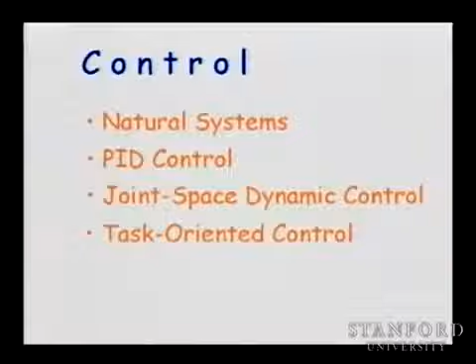And then we'll discuss how we can apply control techniques directly to the task, the way humans do it—by directly applying a force, not through inverse kinematics or at the joints, but directly controlling the end effector's motion, velocity, and acceleration.

At the end, we'll see that motion control isn't the only thing we need when we have a robot. You really need to interact with the environment, and to do that you need to control the contact forces. If you're sliding over a surface, you're moving while also applying a contact force. That's going to be a critical technique in order to interact with the world, affect objects, assemble, move, and cooperate with different robots.

So a manipulator like this one can be controlled directly through its joint motion by simply imagining that you have springs at the joints. And if you just put springs, this mechanism is going to oscillate if you disturb it.

So what do we need to add? I'm just talking about a passive mechanism—you put a spring and now it holds itself at some configuration, but if you disturb it, it will oscillate. So what do we do to make it asymptotically stable? Put some damper. If you place a spring and a damper at each joint, you'll basically go to that resting point of all the springs, which allows you to be at that configuration.

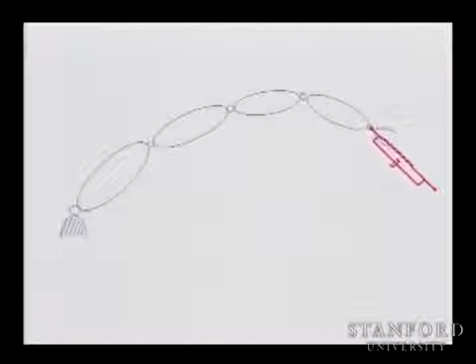Yeah, so exactly, I mean just pull it, right? Just put the spring there. Anyway, I gave you only one spring, so you have to just place it somewhere. All right, so, okay, what is going to happen here is you are going to pull the end effector to that location, to the resting position, and it will do this, and everything will fall. You don't know where it's going to be, but it will fall.

And we will see that the concept is as simple as this, well, in 6 dimensions, x, y. So the spring is like a 6-dimensional spring. All right, so this is basically the concept of task-oriented control.

I mean, you can think about the spring as a passive spring, or some attractive potential energy that you are creating at the end effector, with a gradient that is pushing you towards the goal. And that gradient is actually coming from the spring. The spring has a potential energy when it's disturbed, and when you go to rest, you reach the minimum of that energy, and essentially you're applying the gradient of the potential energy.

Okay, so in joint space, this is what is happening. As I said, we have an inverse kinematic problem. We have a task that is described in terms of x, y, z, the orientation of the end effector, alpha, beta, gamma, whatever representation you have. You need to compute the desired joint motions, and then you have those, desired motion 1, desired motion 2, etc.

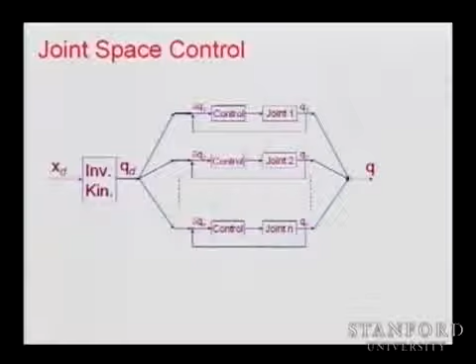The problem is you have this inverse kinematic all the time in the system. Another approach that came about as early as 69, 70, 71, and there is a paper by Dan Whitney in 72 describing resolved motion rate control. So rate means we're looking at the derivative, the velocity, and the idea is, instead of doing the inverse kinematic using the forward kinematic and taking its inverse, to find a small displacement, delta theta or delta q, that corresponds to your desired displacement, delta x.

So what do you think we have in our menu as models that could help there? So we would like to find a relationship between delta x, a small displacement. So I'm at x, I would like to move a little bit, delta x. What would be the delta q?

So what model should we use? And you don't say it. Someone else.

Yes, the Jacobian. Actually, the inverse of the Jacobian. Here is the Jacobian, it relates precisely delta x to delta theta. If you take the inverse, you have to make sure you're not at a singularity, otherwise you have to do special treatment of the configuration. If you're outside of the singularity, and if you have 6 degrees of freedom, regular case, square matrix, then you can take the inverse. Otherwise, you have to resort to generalized inverses or pseudo inverses.

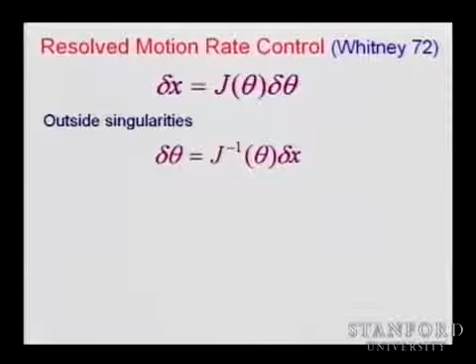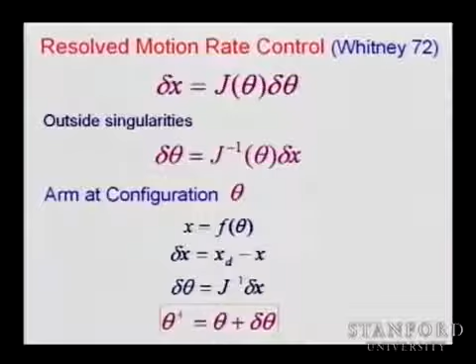So you compute a delta theta. So for a small delta x, now you have your delta theta, knowing your theta, knowing where you are, the next configuration you want to go to is theta plus delta theta. You start from your current position x, you compute the error, that is the x desired minus your current position, and then you compute your delta theta and you add it to theta. So you keep controlling the robot to this theta plus, which is where you were plus the small displacement. And this is a vector.

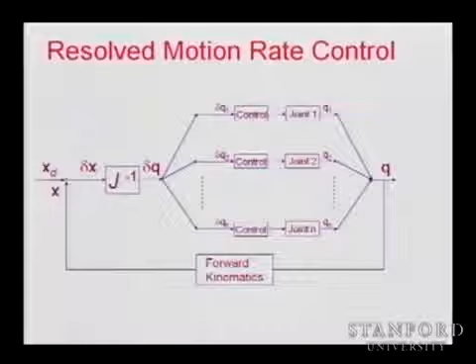So here is the model. Now the Jacobian inverse is inside your servo control loop, and you need to compute the forward kinematics, which is easier to compute, especially for you now. Very easy, forward kinematics. So forward kinematics include the Jacobian, you just have to invert the Jacobian. And for a small robot, you can get it almost in analytical form. So basically, you compute a delta Q and you distribute it to all the joints. And you have controllers for each of the joints to move and form this error in delta Q, and you move. So now you're continuously moving.

Well, this has a lot of problems in terms of the conditioning of the Jacobian, the fact that the Jacobian has this strange thing about its metric, because the space where you are measuring delta x involves linear motion and angular motion. So linear motion is measured in displacement in centimeters or meters or inches, but it also has rotational motion measured in degrees or radians, and it's all included in the Jacobian. So the metric of the Jacobian is not homogeneous, and that creates problems. Also, you have the singularities, you have the redundancy, you have all of that, in addition to the fact that you have dynamics.

So this works usually most of the time, but it works best if you use it to find the trajectory you want to execute. In industrial robots, often you want a repeatable trajectory, and this doesn't repeat, you will drift. So if you do this in simulation, you will be able to find a trajectory, resolve the inverse kinematics this way, and then come up with a trajectory that you can execute.

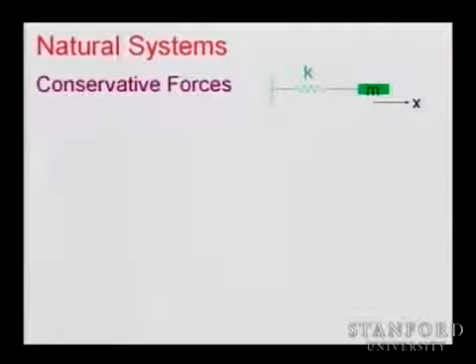So this is K, and we can write this equation. If you write this equation using K that we saw here, and take the derivative with respect to x dot, it gives you mx dot. The derivative of K with respect to x is 0. So you get the time derivative of that quantity, mx double dot equal F.

And the potential energy of the spring is 1/2 kx squared. That gives you the gradient. When you take the derivative with respect to x, you get minus kx.

So the Lagrange equation is a Newton equation. In this case, mass times acceleration equals force, and the force is minus kx. It's a conservative force. So you are transferring energy between minus kx and the kinetic energy, which is building velocity and acceleration.

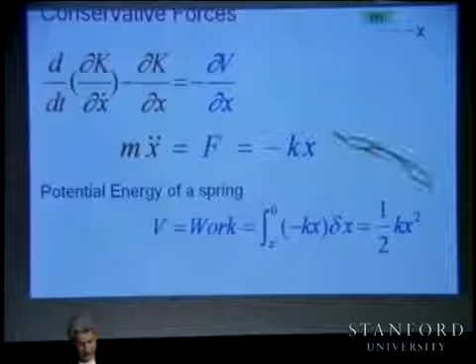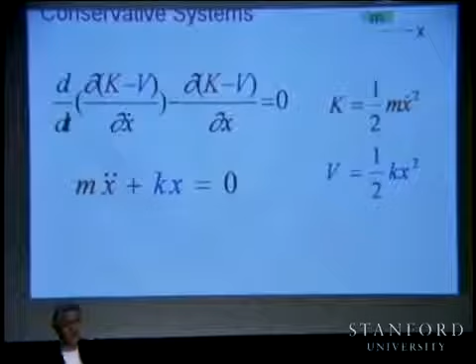For some reason it's written twice, I don't know why, but now I move this minus kx to the left-hand side of the equation, and we have mass times acceleration plus kx equal to 0. So there are no external forces. This kx is the gradient of a potential energy V, and this is the acceleration of your mass.

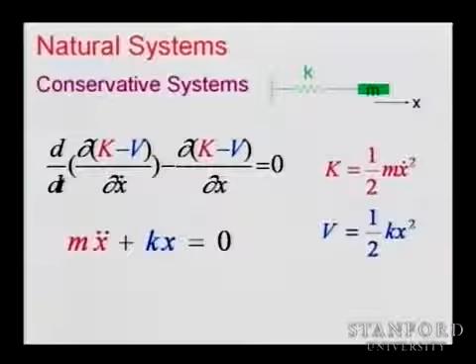Now, let's take a look at the response of this system. I'm not sure if you can see it. You see this red potential energy over there? This is the potential energy of the spring. Let's imagine this green dot is the point mass we are going to drop.

So if we drop this point mass, it's going to fall and it will oscillate, right? There is no friction, so it will keep oscillating forever. This is time, and we are looking at the frequency of crossing this axis. That is, we're going from one side of x to the negative side, and there is a frequency of crossing. So my question to you is, in relation to these two parameters, K and M, what is the effect of M on the frequency?

So if your mass is heavier and heavier, what is going to happen to this frequency? And if your K is smaller and smaller, what is going to happen to this frequency? So if K is very big, what would happen? If K is 0, what is going to happen? K is 0, nothing would happen.

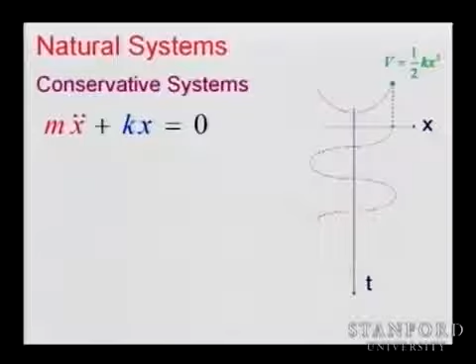Right? K is larger, the oscillation frequency increases. So frequency increases with K and decreases with the mass.

There is this quantity that we call the natural frequency of the system, and this is the square root of K divided by M. Anyone know why, where this omega is coming from? Do you see it from this top equation? Somewhere.

Yeah, if you normalize the above equation... basically, yeah, this is A multiplied by sine omega T, and then—very good. You integrate the equation and analyze its response. If you don't trust this result, let's see how we can resolve and integrate this equation. So if we divide by M, we get the acceleration plus K divided by M times x.

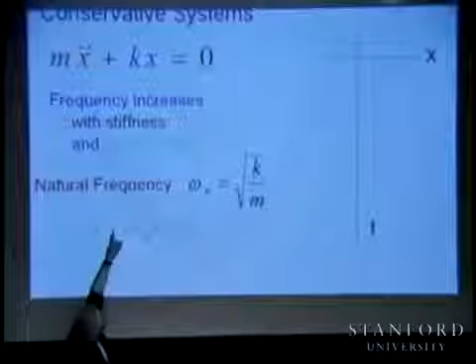Now if you integrate this equation, you get the square root of this coefficient of x that will appear. We usually rewrite this equation on top as omega squared x. So K divided by M is really the square of your natural frequency. And if you write this equation and do the integration, you get a sinusoidal response where omega appears as the frequency of your sinusoidal motion.

So in fact, x that comes from the integration of this equation is some constant times cosine of omega t plus phi. So what do phi and c depend on?

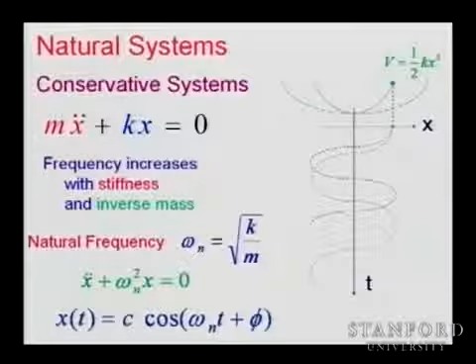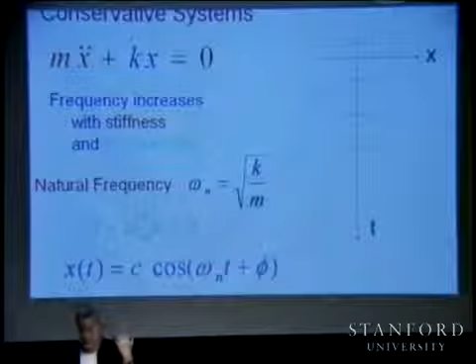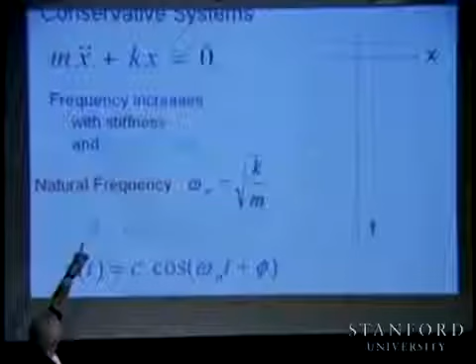Well, if you understand this, we need just one more step, and then you understand PD control. It's very simple. PD control actually is imitating the natural system to recreate a spring. This K will become your stiffness. K is the stiffness, and M is the mass. K will become your proportional gain, and in a few minutes we will see another K that involves the damping that also comes into the equation, but not of conservative system, of dissipative system that dissipates energy because of friction.

So if we are looking at only conservative system without any damping, this is the response. Okay?

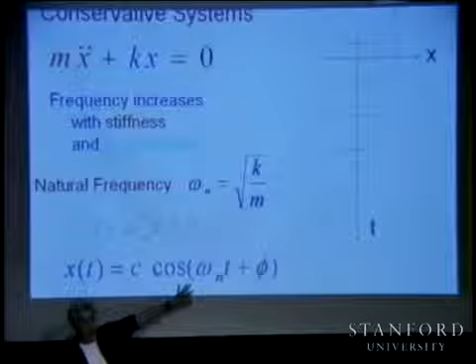So in fact, if we just add a little bit of friction underneath the mass as it's moving, there will be some dissipation of energy, and this dissipation would be a force opposing what? Opposing the motion, opposing the velocity. So it's sort of minus some coefficient times x dot.

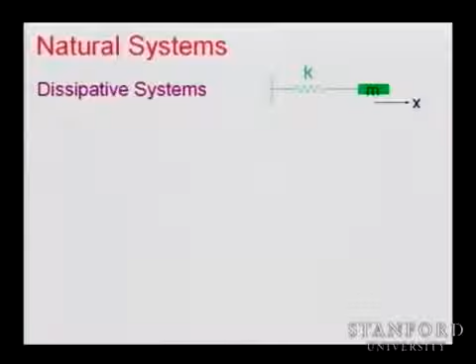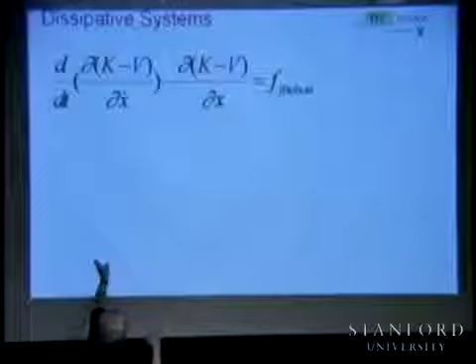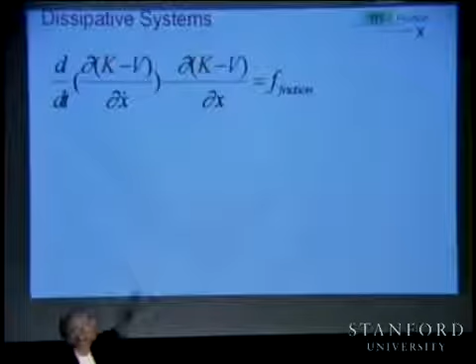And that friction, if we add it to the system, we have to add it on the right hand of the equation. So the Lagrange equation is capturing the natural system on the left side. On the right side, we are putting a natural force, which is friction, but we cannot put it in the left side of the equation because this force is not conservative. It is not a potential energy force. It cannot be integrated in V. So it appears on the right hand of the equation, an external friction force applied by the environment on the object.

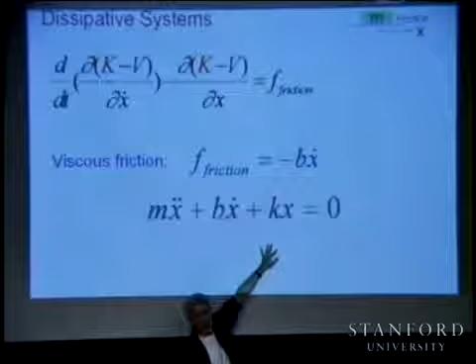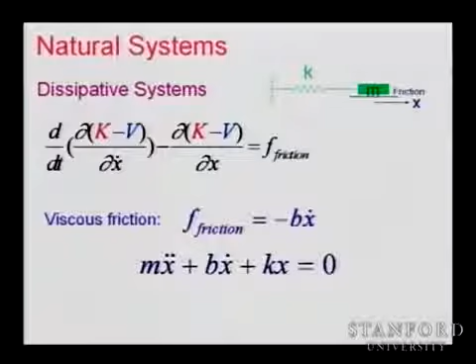My system is not anymore conservative because if you oscillate now, you're going to lose energy, and little by little you lose energy and then you stop. So the mass acceleration plus bx dot plus kx is the general form of a linear system of the second order.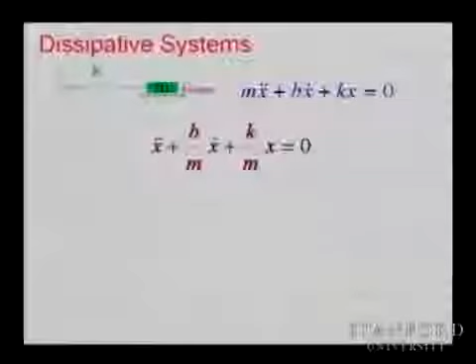And if we take the system and analyze it, so what we do, we divide by the mass. Do you see omega squared now? So we have omega squared, and it's, thank you very much, finished. So I can continue.

Now, what we are going to do with B divided by M? Well, when we integrate those equations, this term is going to appear in some form. So what we would like to do is to see how B is affecting this damping.

So for instance, if you put a large B, very, very large B, and you start falling, you're falling, you're falling. Well, if B is very large, are you going to cross? You will just asymptotically reach that goal position without crossing. So you have sort of an over-damped system. If B is very small, you're going to oscillate, and eventually you will lose the energy and you will converge towards the minimum of the energy.

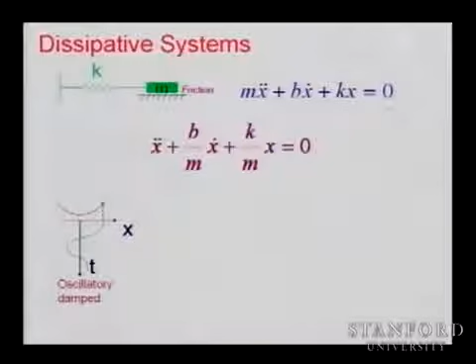So here is an oscillatory damped system. With higher values of B divided by M, we have an overdamped system. And as we move from here to here, there is a special value at which we just go and reach the x-axis. And this value is called the critically damped system. And remember this, we're going to use it a lot, because we try to imitate this behavior when we control any of the systems. We will try to make it critically damped system.

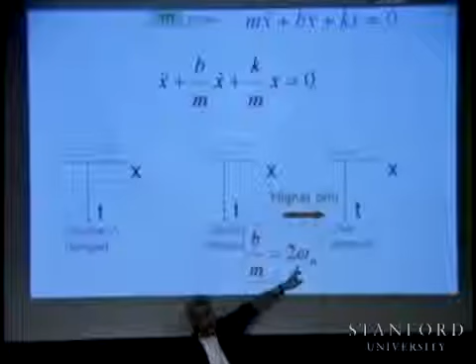So we need to know for which value B divided by M reaches this state. And the value of B divided by M is simply 2 omega n. So when B divided by M is equal to 2 omega n, omega is square root of K divided by M, well, then we have a critically damped system. And this comes simply from the integration of the equation, this condition.

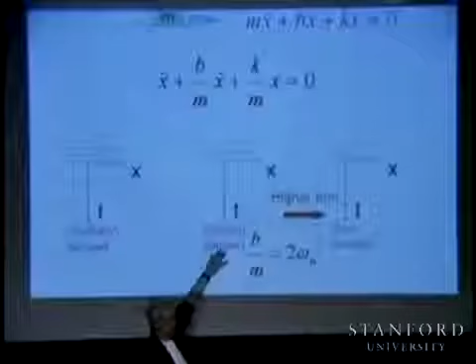So now you can compute B. B, the critically damped B, is equal to what? Come on, 2 omega n times M. All right. So if you know your mass, if you know your K, then you can compute your B to be a gain for your control system. Here B is the natural damping of the environment. So the system is passive.

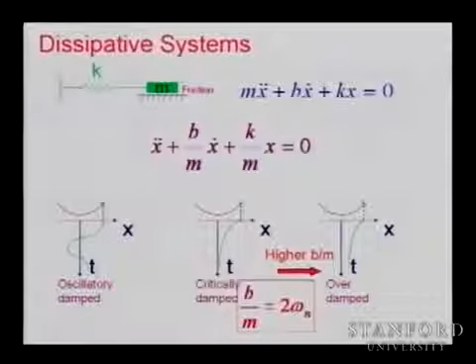So let's take this 2 omega n and try to make it explicit in that first equation. I'm going to rewrite it as a function of omega n and as a function of this critically damped system. To do that, we take B divided by M, the value we have right now, and compare it to the value that gives critically damped behavior. So B divided by M is compared to this critically damped B divided by M. This is a sort of ratio, a damping ratio.

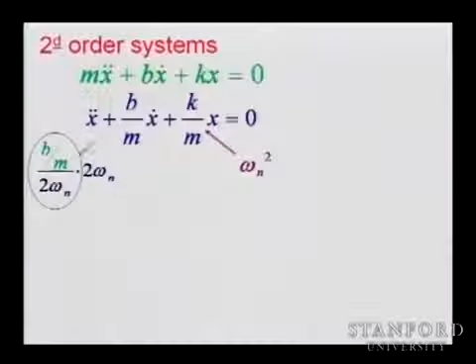I need to replace B divided by M by something that makes 2 omega n appear, so I need to divide by this and multiply by this. You agree? So on the left, I have this ratio, and we call this the natural damping ratio. We use this symbol to represent it. What do you call this symbol? Xi? So we use xi. Xi represents the natural damping ratio. It's B divided by M divided by 2 omega n.

So for which value does the natural damping ratio give me a critically damped system? For 1. When zeta n is equal to 1, it means that B is simply twice the square root of km. And for this value, I will be able to have a critically damped system. Okay, so far so good?

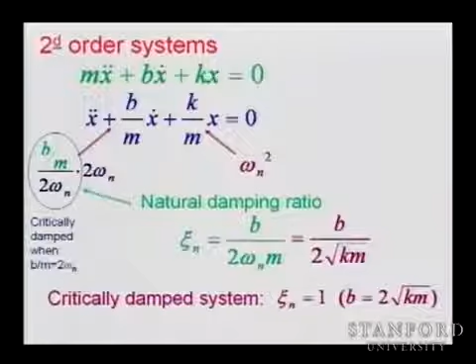Not too confused? So we introduced two notions: the natural frequency, square root of k divided by m, and the natural damping ratio, B divided by 2 square root of km. Now we can analyze our system and write it in this form. The acceleration, it was m times acceleration. We divided by m, and we can rewrite the equation as acceleration plus 2 zeta omega velocity plus omega squared times x is equal to 0.

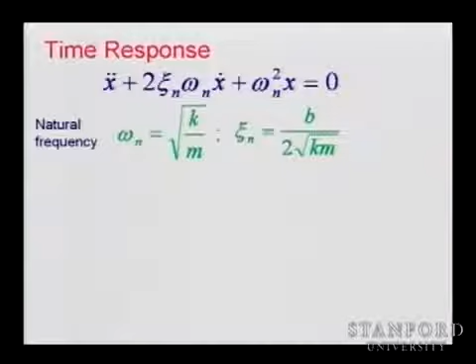Now, the time response of the system requires us to integrate this equation, and if we integrate this equation, we will have this response. Because of the damping, your sinusoidal amplitude is reduced as you move. There is a decrease, and this decrease is exponential, and this decrease depends on zeta and omega. You have the sinusoidal motion, which is a function of your natural frequency, omega, but it's also a function of your damping ratio. You can see when zeta is equal to 1, this will become 0, the cosine of 0. And if it's greater, then there is no cosine because you will have only the exponential.

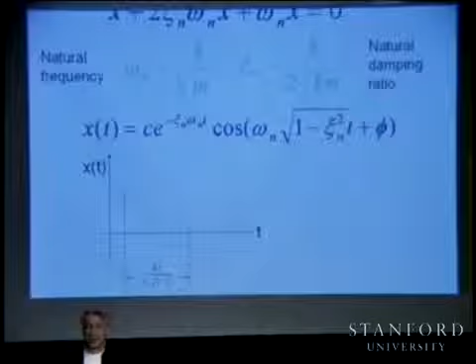Here is the response. So you have this exponential, and you have the frequency that is now a function of omega n square root of 1 minus zeta n squared. That is, the period is 2 pi over omega n square root of 1 minus zeta n squared. So it's not omega n anymore. Omega n was the natural frequency, but this thing that appears there is a sort of natural frequency that is affected by the damping. So we call it omega, the damped natural frequency.

So it was omega, the natural frequency, and now it is damped. I think this is the last definition you need to remember, and with this, we can do almost everything except the nonlinearities we have to deal with a little later. But omega, when you have damping, is really omega n, the natural frequency that appears in your spring, scaled by square root of 1 minus zeta squared, which comes from your damping B divided by the mass and the spring, or the gain of your system.

All right, so these are characteristics of a second order system, and what we need to do is inspire our controller by this, and then we will be able to recreate that behavior simply by selecting what? So if you start with the mass and now you want to create a system like this, what do you need to select? You need to select the spring, which is K, the stiffness of the spring, and you need to select B. So by selecting B and K, you can create this second order behavior on a mass. So if you have one joint with some inertia, to create a closed loop behavior of second order with some natural frequency, some damping ratio, and some damped natural frequency, you should be able just to select B and K and find your system.

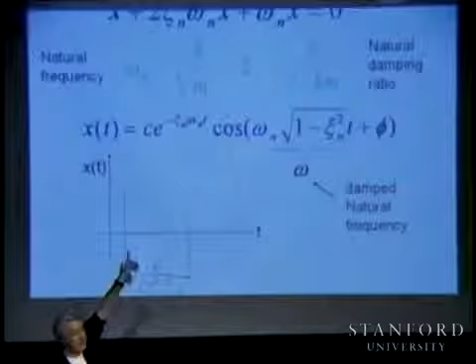Now, compensating for friction is very dangerous. It's not easy. You cannot just go and do some estimate and compensate for the friction. You can compensate for the friction if you want, and I'll show you how dangerous it is.

Okay, here is a robot. What is the name of this robot? The Puma. Okay, let's move it.

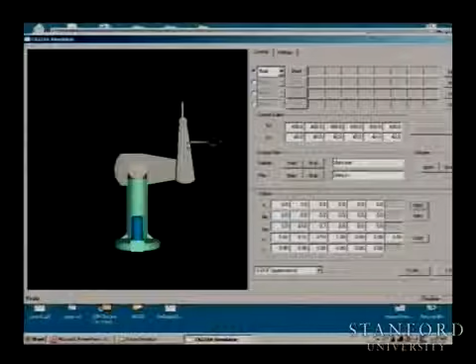It's moving. Well, it has some friction. What is this friction it has? You see, I'm moving it, and it has friction because it has natural friction. But if I remove this friction, okay, now I remove the friction.

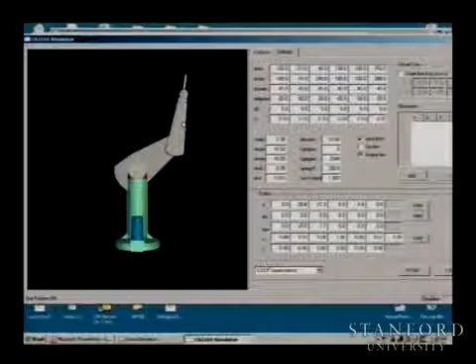Look what's going to happen. I'm going to apply a small force. Are you all attached? We're going to move. All right, we saved it.

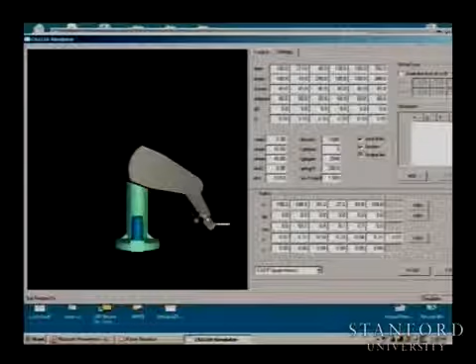So you can see if you compensate for the friction, you start to quickly have oscillations, and you will have instabilities.

So let's say the robot is controlled now with those springs. You have 400 - these are the values of the springs, and you have some value for the B's, basically in here, 40. This is joint 3. So if we change this to be like 40...

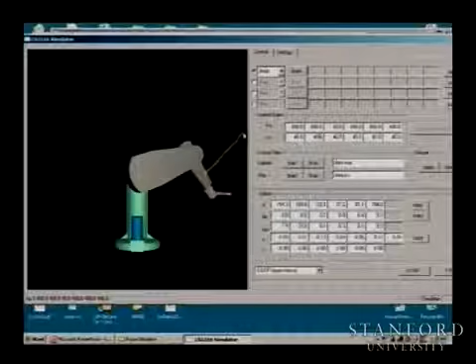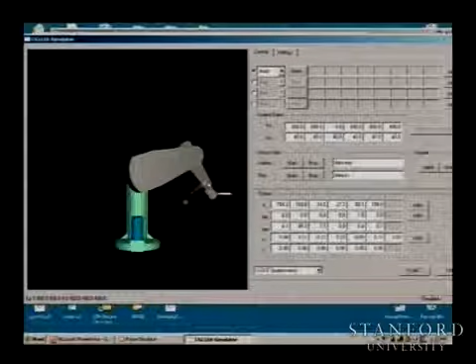No, that's too much. Let's make it 4. Now it's easier to move. But you see the damping? It's still like over damped. When you move it, it is not responding.

So let's make this very small. Now there is a little bit of motion. If we make this 0...

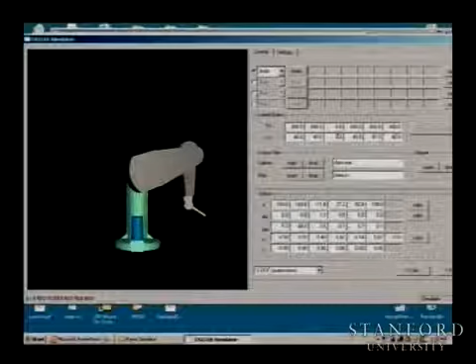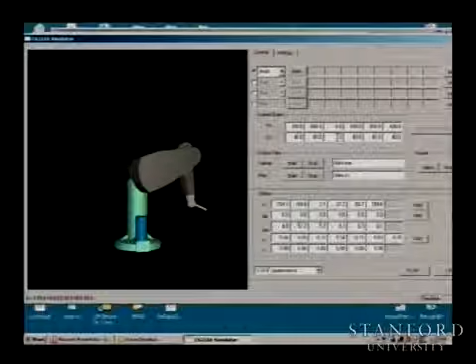So now if we start putting negative damping to compensate for the natural friction, we're going to go unstable. So this is a small amount.

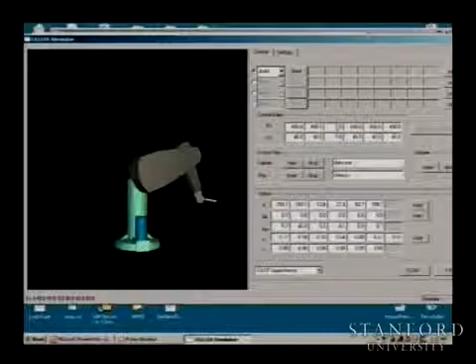Okay, how about -9? And let's put a little bit higher again here. Okay, and obviously you're going to go unstable.

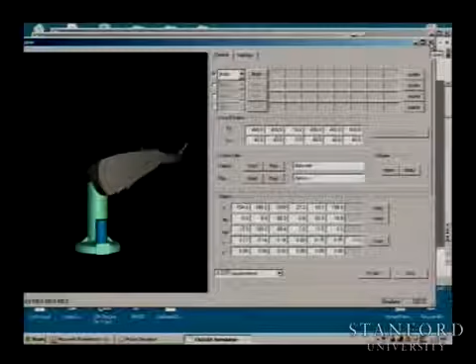The real time is not real, that's why it is a little bit weird, but it is. So don't try this. No negative damping. It works - positive damping is very good. Okay.

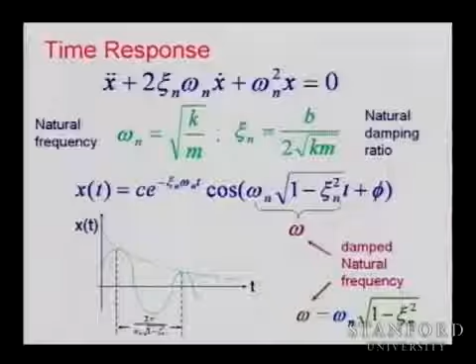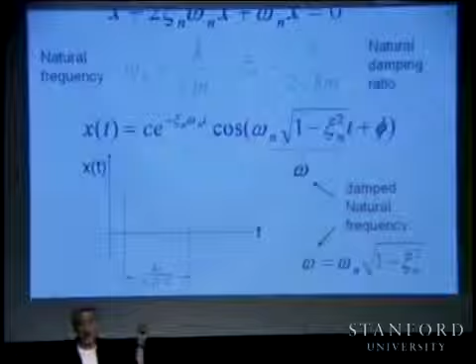All right, so remember this omega - is it bigger or smaller than omega n? You get your omega n from the square root of k divided by m, and now your omega after damping is smaller. Good.

Okay, all right, don't look now at notes, please. We're not hiding, but you have the answers. But think about this: what is your damped natural frequency? We just saw the expression.

So don't look at your notes. Okay, try to compute it. So how do you compute your damped natural frequency? You need to compute the undamped natural frequency. The natural frequency is what? 8 divided by 2, square root is 2. Your damping ratio is what?

b divided by 2 square root of km. So km is 16, square root is 4, 2 is 8. Okay, so this is your omega. This is your zeta, it's easy to remember, b divided by 2 square root of km. Remember that? And your omega is 1.6, so you reduce it from 2 to 1.6.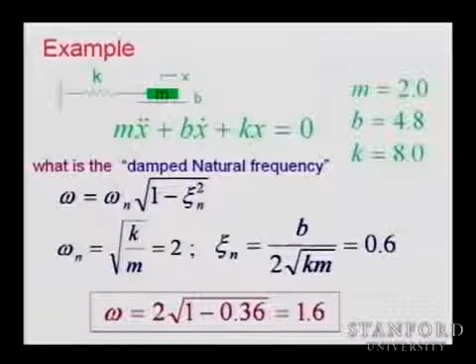All right, so we have another video segment next time, but we will skip it now. So let me...

We have a little bit more time, so I'm going to go over 1 degree of freedom that we are going to control exactly as we did with a passive system. So a 1 degree of freedom robot, we're going to assume that the robot has just an inertia or maybe a mass, so it's sliding. Maybe mass is better. If we take a prismatic joint, a prismatic joint is going to involve just the mass of the moving link.

And we're going to move it with a force, and we are going to create this force as a spring. And now we want to move to some location, so that would be the resting position of the spring. Then we can recreate exactly the same behavior on the robot. So here is the one link robot, it's simply a mass. Probably this is the simplest robot you can imagine. It is a mass moving under this force of the motor. The motor is going to apply a torque translated into a force F, and you want to move it from its current position to X desired.

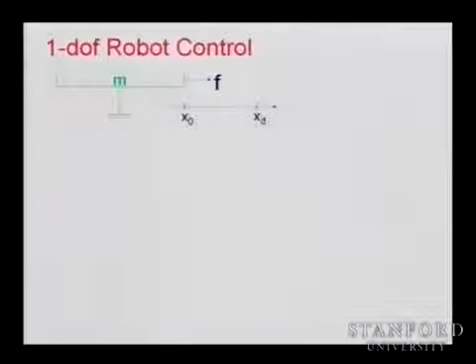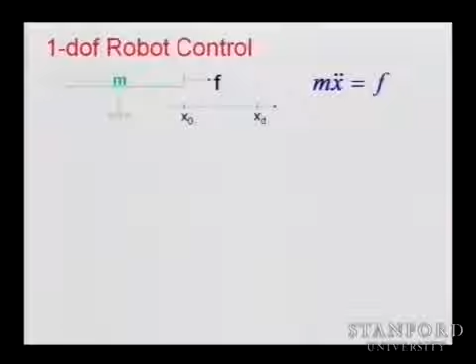Okay, simple problem. So we have mass times acceleration equal force. So now your force is your motor force, and your task is to create a force that will let you move this prismatic joint from its current position to the goal position desired.

So the same thing as a spring, what we're going to do is we are going to create this spring, or potential energy, whose minimum is at X desired. So the potential energy that you're creating is positive everywhere except at XD, where it is equal to 0, so it's 0 at your desired position.

And it means that you could have something like a quadratic potential energy with some gain Kp, which produces a gradient that is equal to what? What would be the gradient of this potential energy? F should be what? So you take partial derivative with respect to x, and that would be kp times x minus x desired.

So your system is simply mass times acceleration plus kp times x minus x desired. Okay? So here we have the zero of the spring moving, changing with your desired position. That's the only difference, that's it, and that doesn't change anything, that just changes the zero. So instead of talking about stiffness, we are going to talk about the gain that you are using for your error in position, so we call it position gain.

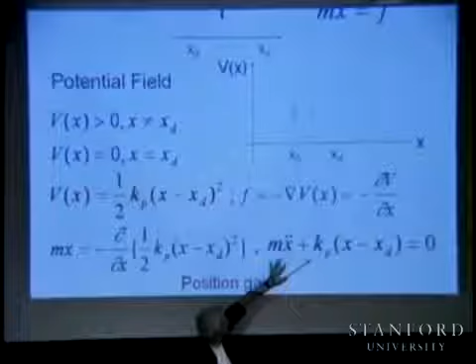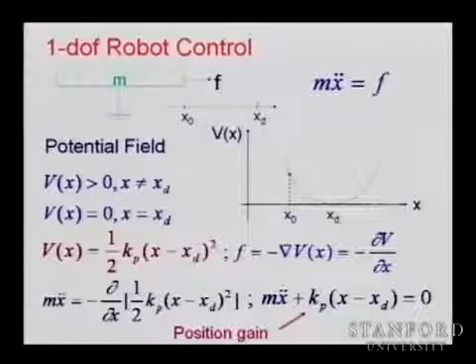So our potential energy is this. We took the gradient of the potential energy and we applied it. Now, going from this page to this page, it's interesting because here I was looking at just 1 degree of freedom. But if we go here, we can show that whatever the number of degrees of freedom, if we apply a controller like this...

Essentially, so this could be 6 degrees of freedom, 20 degrees of freedom, whatever the number of degrees in the system, if your potential energy is in this form, and if you are applying a force that is the gradient of that potential energy, then you can move it to the left side, and now you have your potential energy in this equation. So what is happening here is that your Lagrange equation is showing you that you have a system on the left-hand side that involves only kinetic energy and potential energy equal to zero external forces.

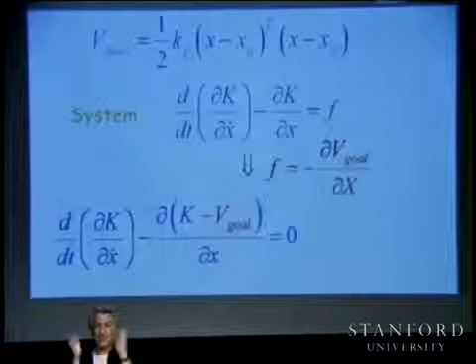So what do you expect in terms of the stability of the system? If you have a mechanical system under potential energy and kinetic energy with no external forces, because all the forces are conservative, are gradient, what can we say about this system?

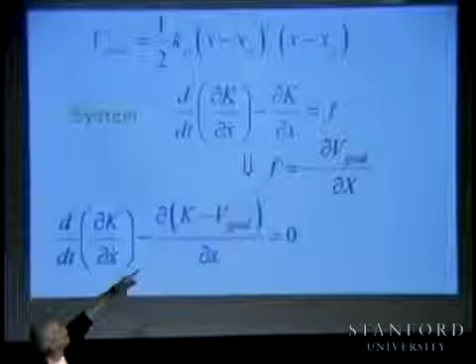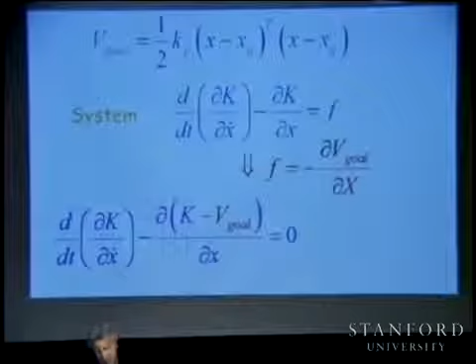It is stable. So simply by selecting your motor controls to be the gradient of a potential energy, you guarantee that your system is going to be stable. This is a very important result, because now we know that if we use this form of control, proportional to the error, which is the derivative of a potential energy, then we are going to be stable.

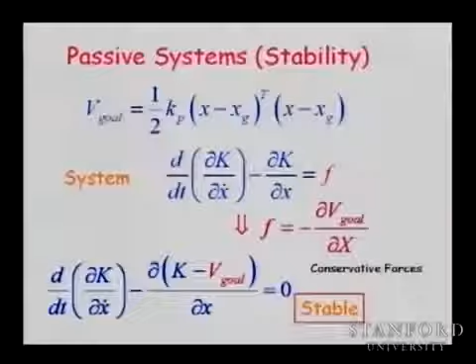Now, stable is not sufficient, because it can be oscillatorily stable. Actually, this system, we know the response of this system. It's going to oscillate. So this force is not sufficient.

What should we do? We should add some damping. We should add some dissipative forces. So here, I'm going to change this zero with some damping. Very good, we're almost there. So this force is not in the potential energy, it cannot move to the left, it is going to be there. And I'm going to put an external dissipative force, a damping force.

But I need to know in which condition. What are the conditions on this force? What conditions are required in order to make this system asymptotically stable? What does it mean, asymptotically stable, by the way? You understand what it means?

So this is the behavior of oscillation that is damped, critically damped, or over damped: your system will converge toward the goal and reach that goal. This is what we are trying to achieve.

And this dissipative force that we saw before was doing something to the system. Do you remember? Someone here said something about that force. That force was doing something to the motion, or?

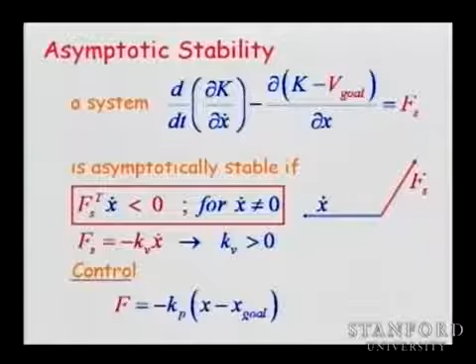Very simple. So come on, pick one force that satisfies this condition, the simplest one. You just said it, so you can pick minus kV times x dot, with kV positive, that would satisfy this condition. So if we apply Fs equal to this linear damping, then essentially we take this control, the conservative part of the force, and add to it the damping part.

These two pieces represent the PD control, proportional derivative. So if you want to move to a goal position, all what you need is a term that captures this error. This goal position could be far away even. So it's like a step response.

You're stepping x to this goal position, and you have damping that is trying to reduce x dot to 0, because here you could have x dot minus x dot desired. But because you are not tracking a trajectory, you are just going to a goal position, you want to stop at the goal position. So it's like x dot minus 0. Well, this is the PD control.

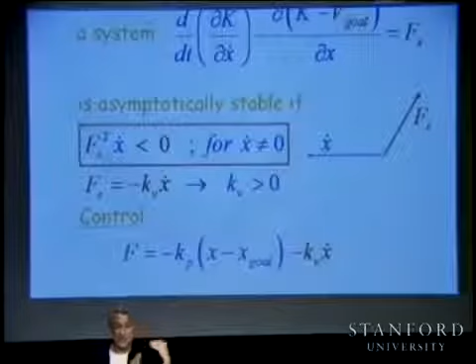Now, how we design this control, how we pick Kp, how we pick Kv, depends on the similar characteristics we studied just earlier with passive system and dissipative system, natural system. So the Kp is going to be picked so that Kp divided by m, the mass of the system, gives you the omega that you wish. So when you are controlling your robot, do you wish to have a small omega or a large omega?

What does omega do to the response? Small omega: so if you want to move from here to here with small omega, it takes a long time. So usually you want a much faster response. If you want a much faster response, I mean, if you move slowly, not only the time response, but also the stiffness of your system matters, because your stiffness depends on Kp.

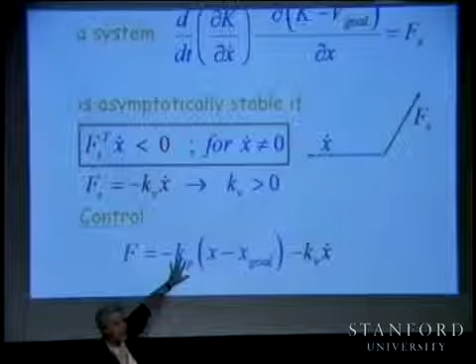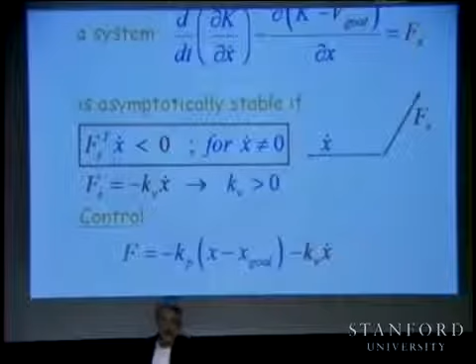Your disturbance rejection is depending on Kp. We will analyze Kp and see why we want higher Kps. We will analyze Kv and see its limitations, and we will see how we pick those Kps and Kvs for given performance of omega and zeta on Wednesday.